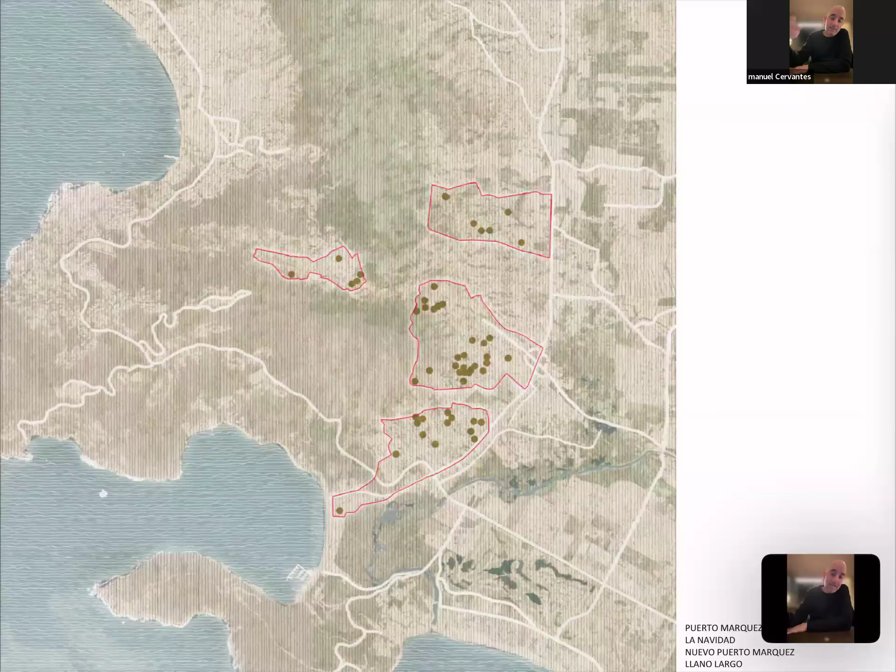That were very important to understand that helping sometimes is not that easy. Sometimes we need to create some circumstances to really help people and really help their communities. So that was the process of selecting the sites, and then the families or the people in need.

Another relevant part of the strategy was to convince all the people involved in the funding and all the companies and people investing in the project that the time to invest in the strategy, to invest in how to really help the people, was also important to achieve quality and not quantity.

Normally, governments and some private companies love to give money to these kinds of associations in exchange for a quantity, in exchange for numbers. So it was very difficult to convince them that it's impossible to design a housing or house solution as a system. So we convinced them with this strategy to first create a specific dialogue with individuals or families to really understand their needs.

A family is not always the same. In the context of Acapulco, we have very different kinds of family structures. We have single mothers, single fathers, grandparents with their kids or grandkids.

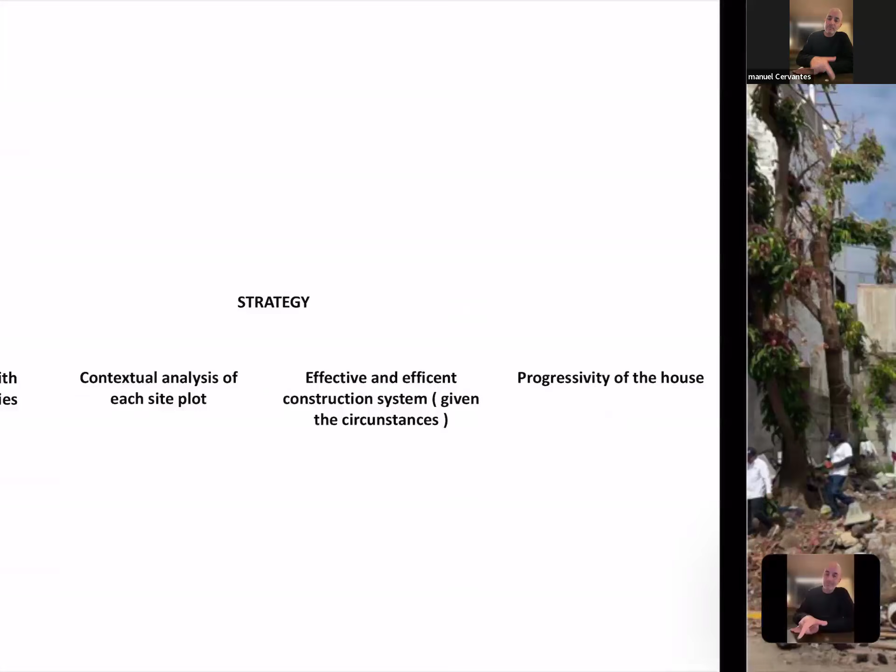So I'm going to show one site, one house, just to exemplify the process of design. This is the site of a single person, Julio Zamora, 75 years old. The house was completely destroyed, even the trees were ripped off. We took this and other houses, but I'll exemplify the exercise with this one.

We tried to avoid the generic prototype of a house that the government in Mexico normally uses. We decided to use what we call 'pie de casa,' or in English, 'starter home.' It's the concept of giving a beginning for the family, an architecture typology that gives these families the opportunity to progress and evolve through time.

Acapulco is a tropical region, with a lot of wind, sun exposure, and high temperatures. So we decided to explode the idea of the generic single unit house and think about the elements that create nice architecture in this kind of environment. The shade, the porch, and traditional architectural elements for this weather were the first strategy to incorporate eco-techniques available for this kind of house.

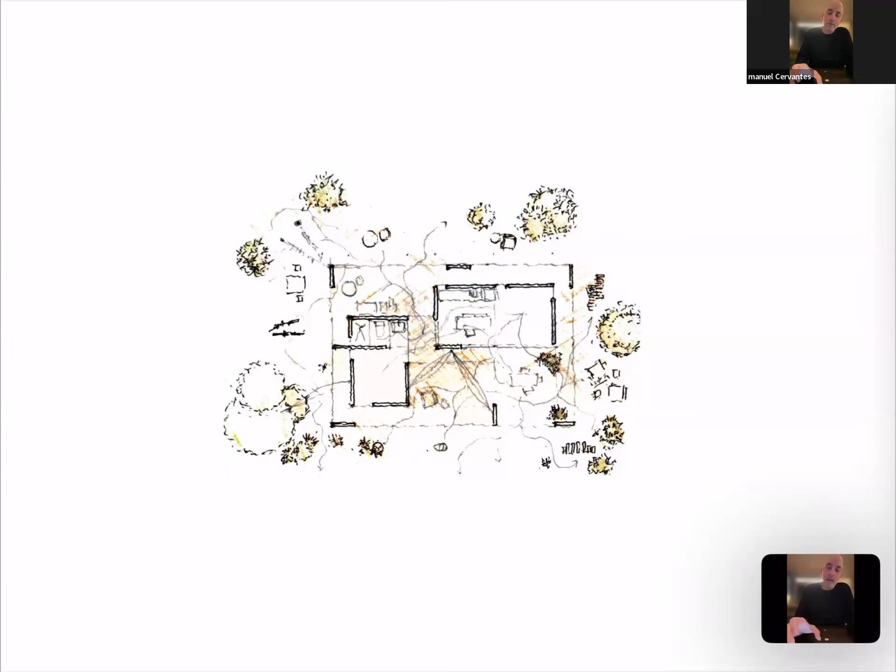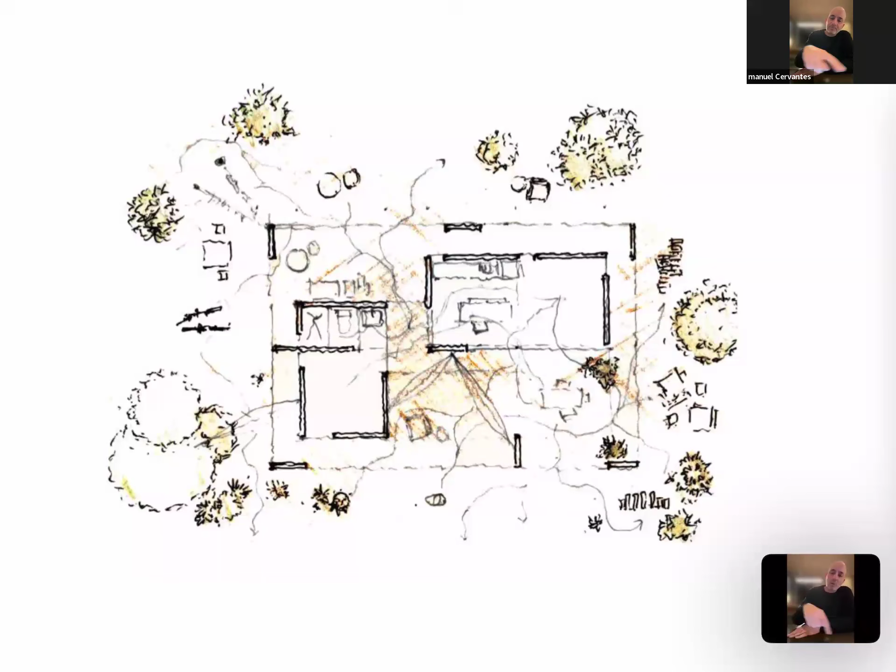We started with this diagram, understanding that a house or home is not about the architecture, the envelope, or the space—it's about how people relate to the outside, to the community, to the shaded part of the houses. In this diagram, we were understanding all the parts of the life of Julio Zamora.

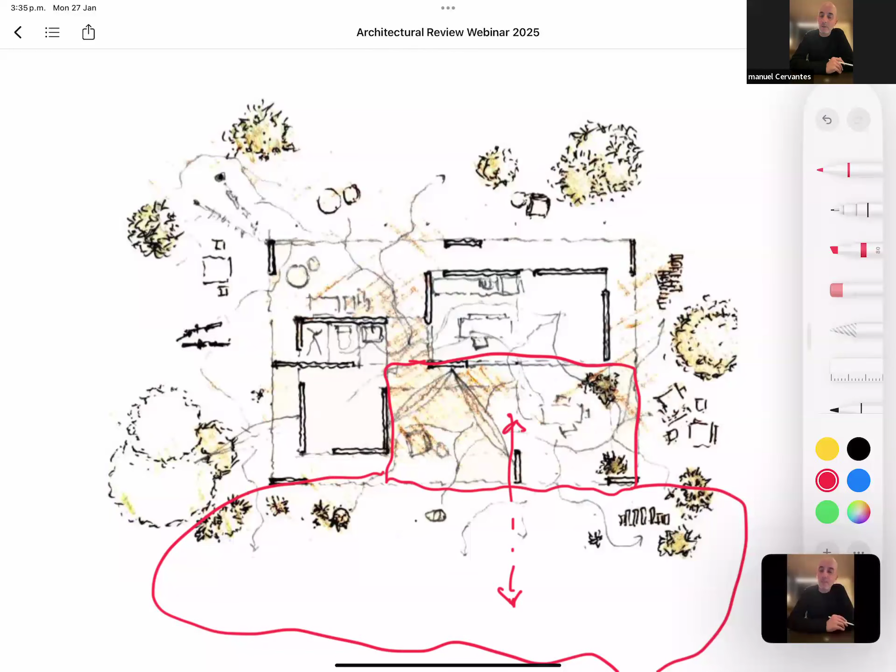Obviously, the big porch in the front connected to the outside, to the street, in order to be part of the community and avoid isolation, especially for an old person. Then understanding all the elements of his life—he had some elements to work with around that porch. The laundry area was next to a back patio, along with bicycles and other elements someone needs inside or outside a house.

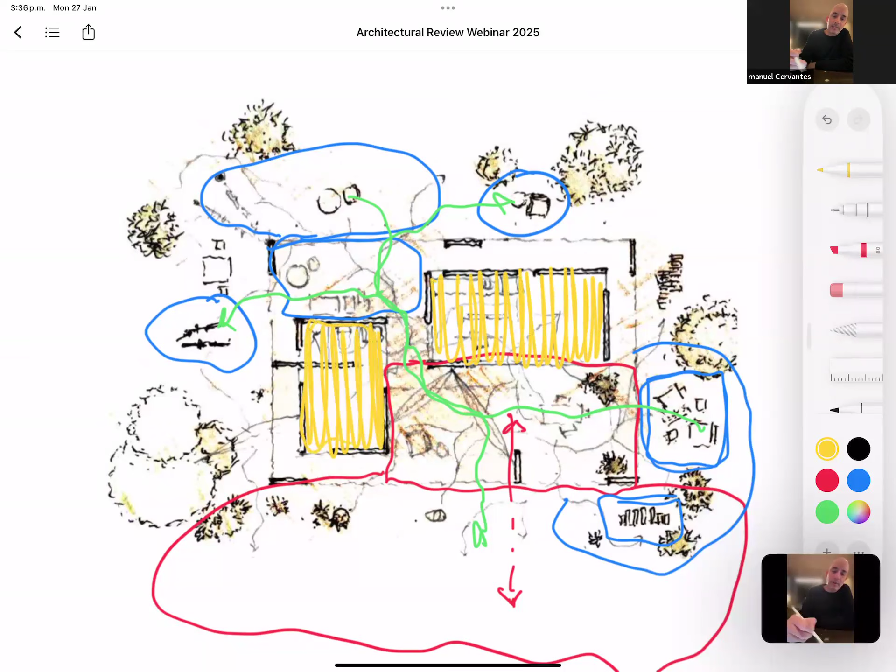Then it was about connecting all those points, connecting all those activities, and understanding that sometimes we're just people floating in spaces doing stuff. So architecture was never relevant as architecture—what was relevant was the activities of this person. At the end, the interior spaces were well connected to the outside and to all these different activities. That was the concept for the houses, attending to this specific area with its beautiful landscape and understanding all the activities.

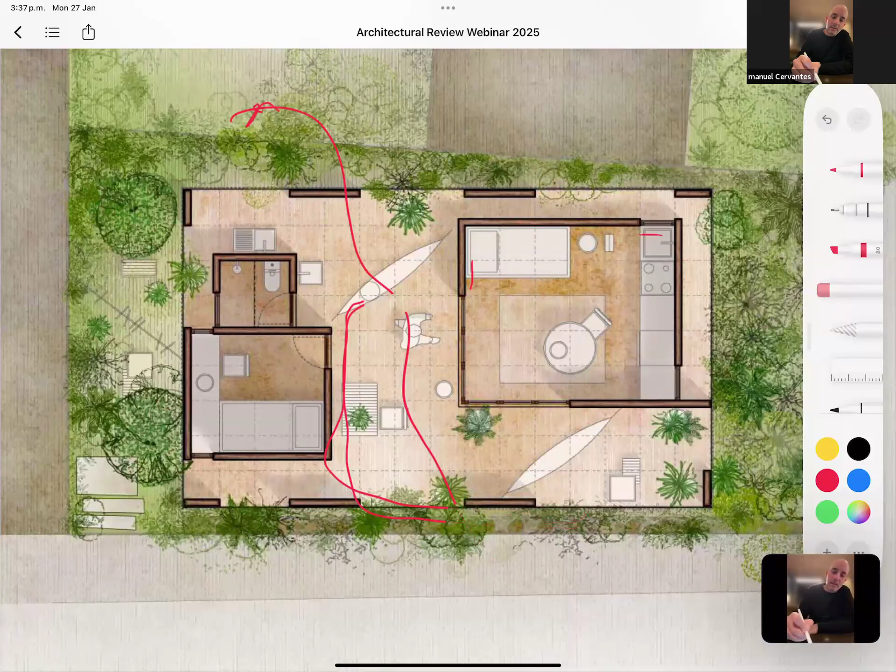So this is the result of this first house under the grid of a system, using those materials that we sent from Mexico City. Understanding the relationship that for this kind of weather is very relevant—interior and exterior, the flows, the natural ventilation, the breeze—creating a space that doesn't need mechanical assistance. There's recollection of water, cross ventilation, porches and overhangs for the sun.

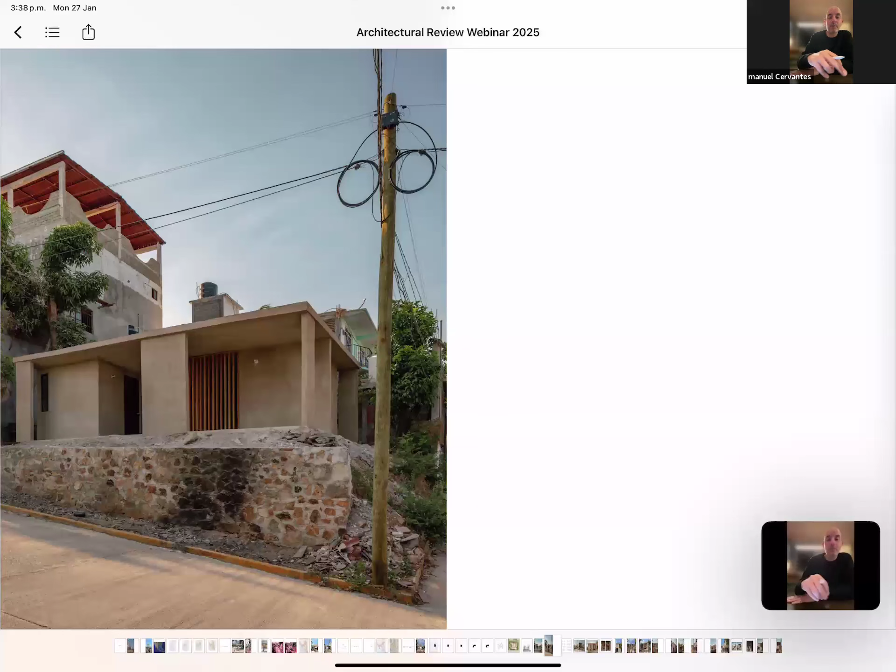And this was the result of this first house. These are some pictures showing the porch, the relationship of that porch and the street, and the relationship of the interior with that lattice communicating and ventilating.

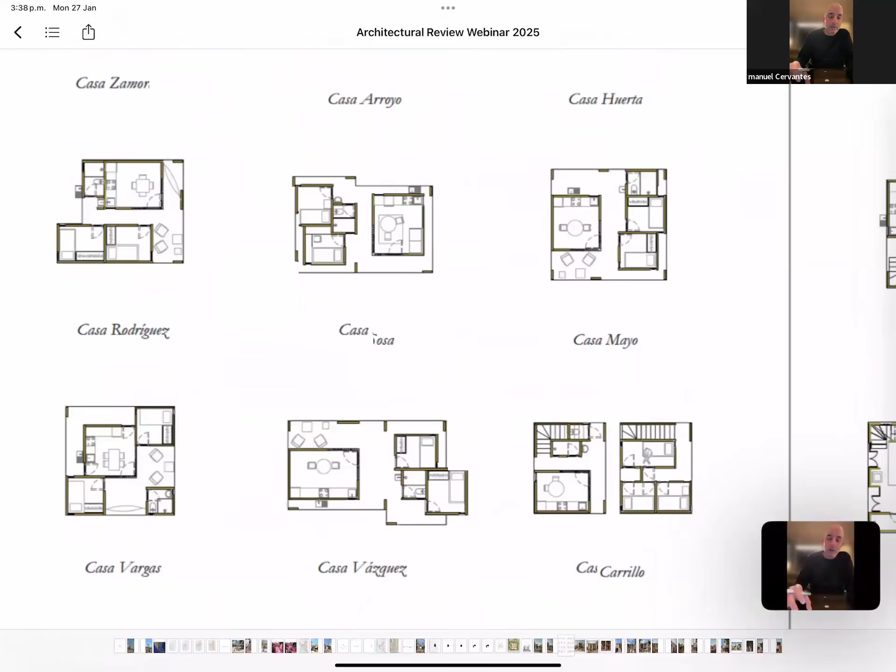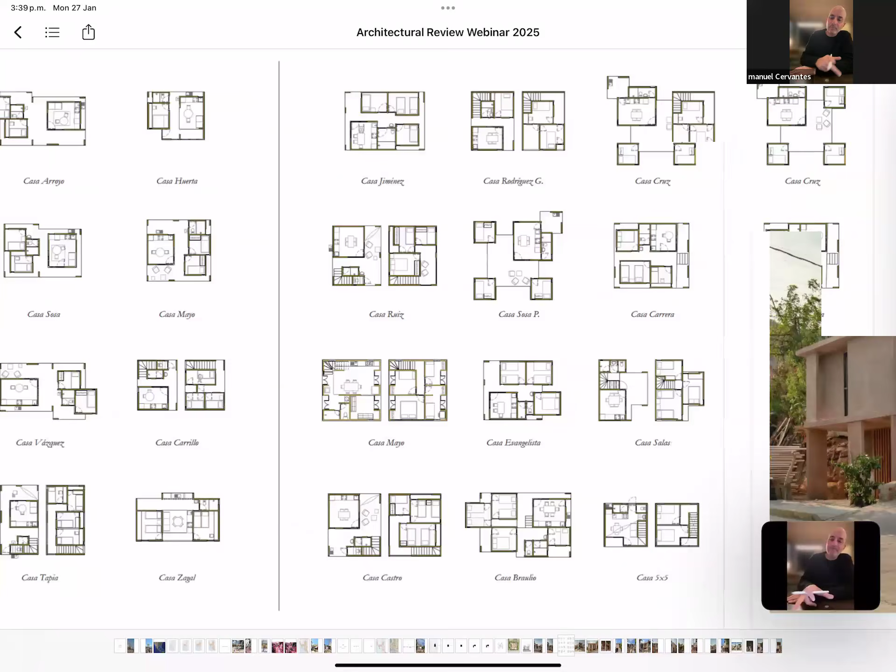Then we started designing many different houses, sometimes for single persons, sometimes for 2 bedrooms, 3 bedrooms, and we went up to the biggest one with 5 bedrooms. We designed houses as an exercise for a family on a specific site with specific conditions—houses of 1 story, 2 stories, even 3 stories, all arranged by the necessities of the people, the site conditions, neighbors, etc. These are different examples of houses within the same community, under the same circumstances.

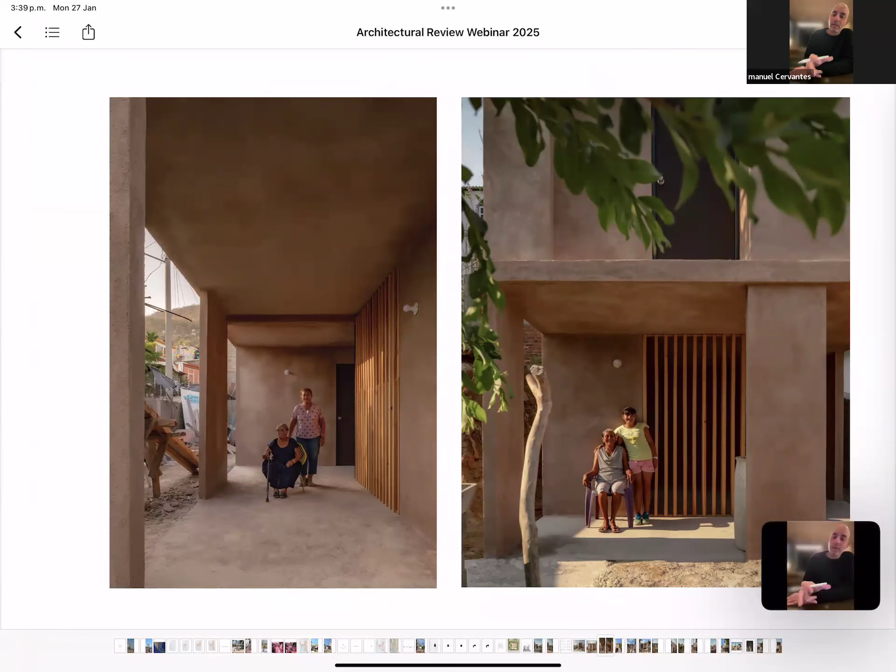Different situations, but the same ideas: porches, places to hang out. This is another typology that I will describe later. These are some of the houses in their context, and some pictures of the families.

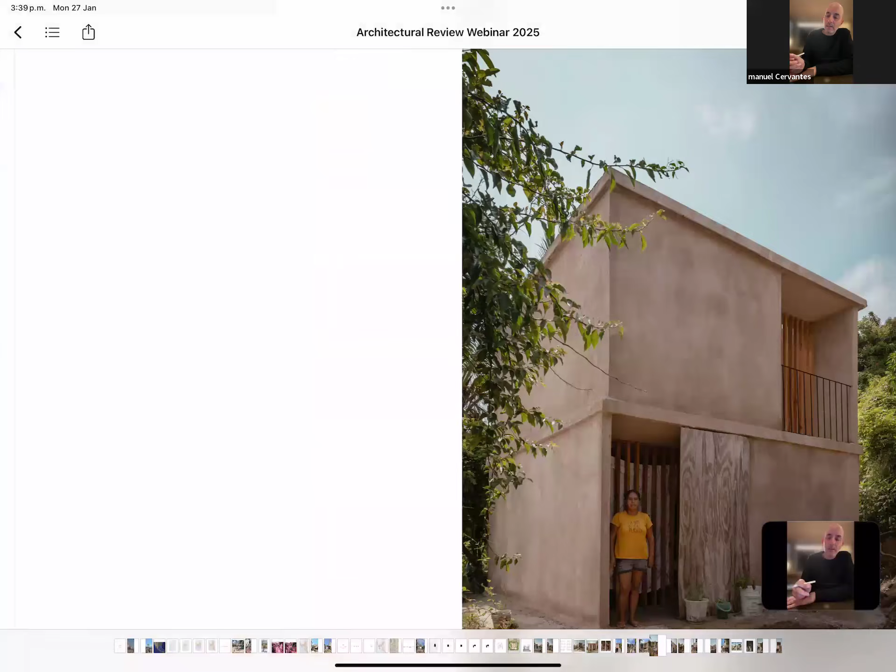Some of the houses receiving that progressive effect. The idea is that these slabs, which stick out a bit from the facade, are intended to receive other systems, creating bigger porches or even other spaces.

The idea of progressivity also recognizes that a lot of these people use their houses as stores or workshops. Many use the house not just to live in, but also to work in. We can see in these examples how they use the porches for little stores.

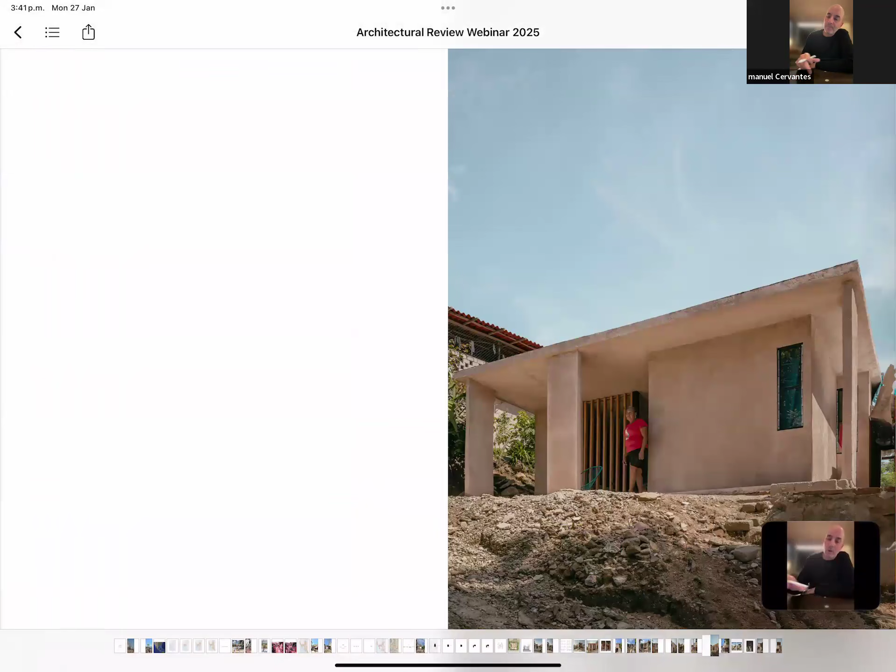Other pictures showing the philosophy. For the progressivity, we designed the system to show them the capacity of the houses to grow not only horizontally, but also vertically.

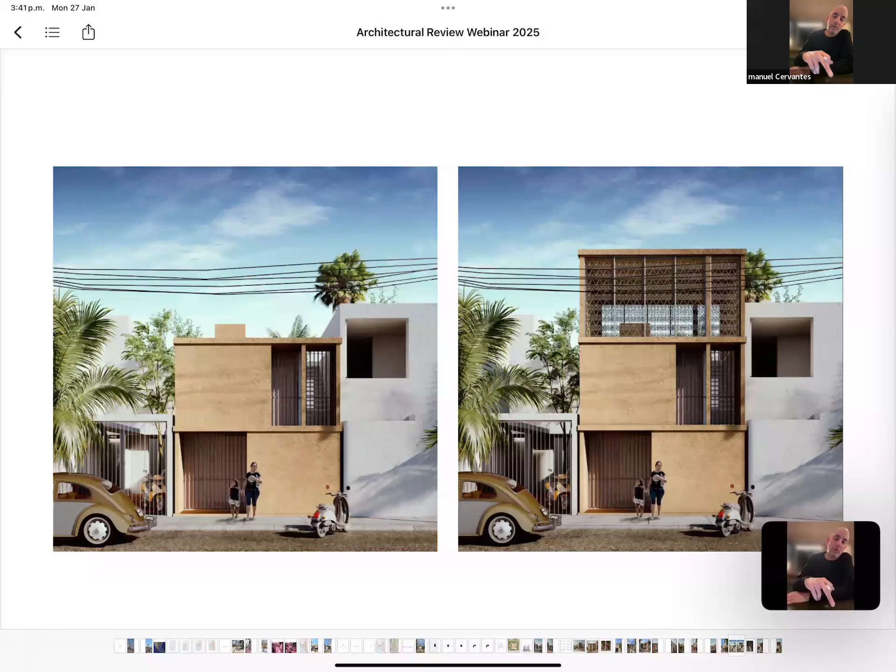So we created a manual, a system to show them how in the future they can go from one to two or even three stories, since that's the maximum of the system. This pie de casa is an investment in something that maybe at the beginning is for one family, but in the future can become two families plus a store.

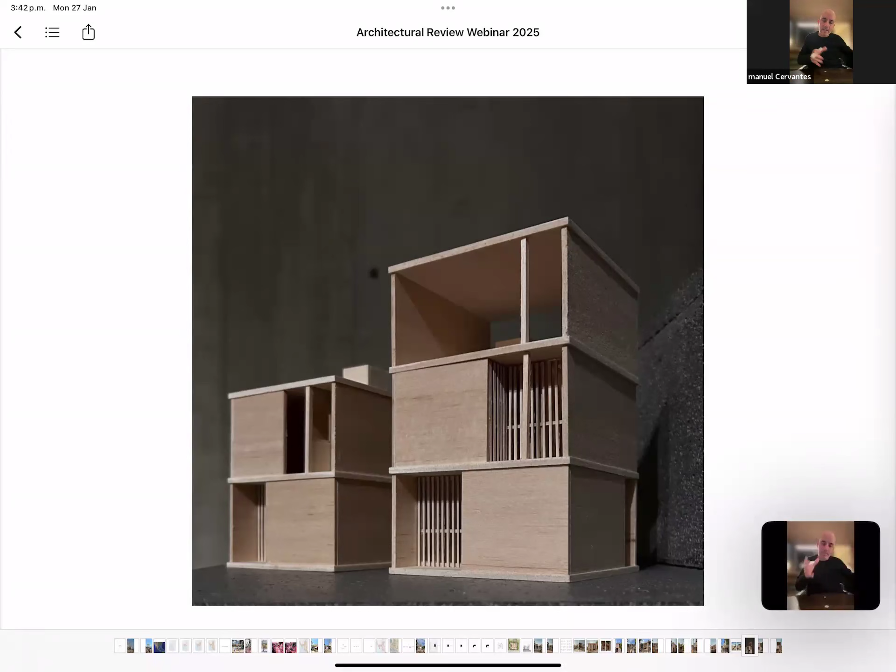In a way we are giving them the opportunity to understand how cities evolve. We can see here the pie de casa, the first two levels, and how they can create a third level to have another family or more rooms upstairs.

And that's it. I think it would be great to jump into the conversation.

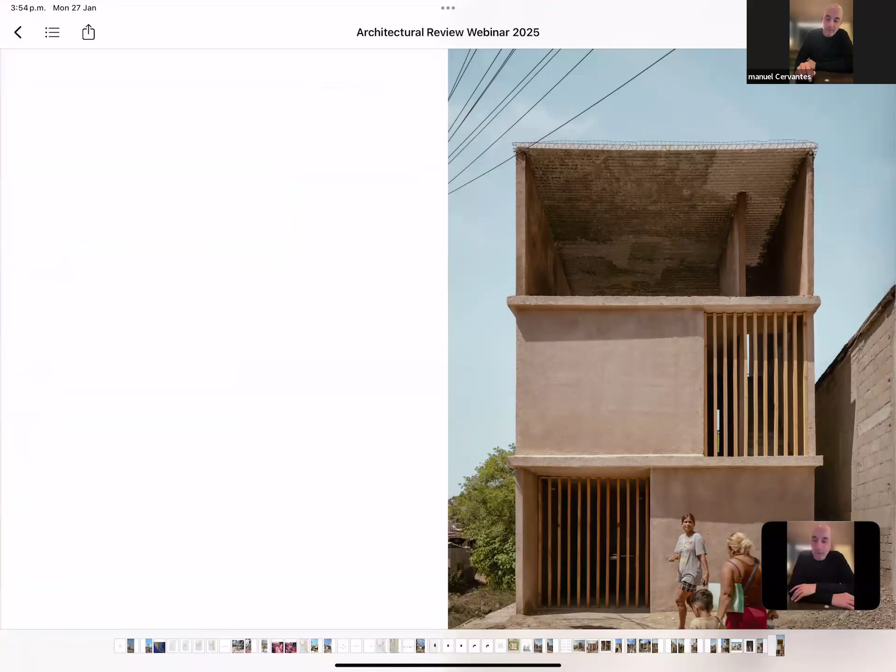Thank you. Well, thank you first for the recognition of a project like this. It has been a big exercise for us at the office, at the studio. And to try to answer the questions, it was very, very difficult to talk with the

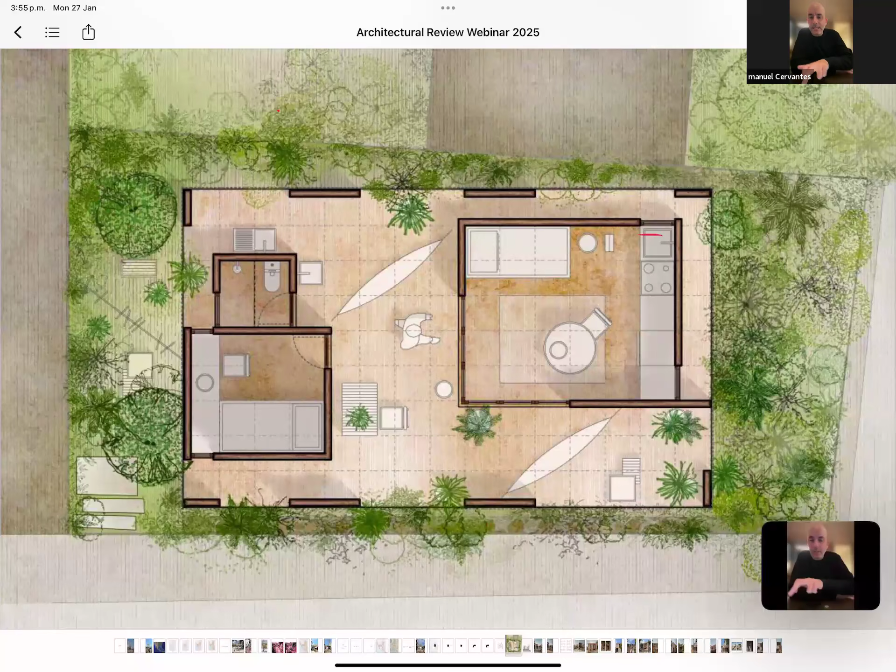families or the people that were under this emergency and ask them for time. Obviously, a lot of these people were expecting to have a quick solution and a quick result. So it was a big process to show them the past governmental assistance and the result of that, to prove that those kind of projects are terrible. And again, ask them for time to think with them in order to understand the real needs. So that was the first big difficulty.

Then we started the process that was, again, not only architectural, it was about finding which of these families were eligible to have a house. Again, to see if they were owners, to see if they were willing to have the help, to see if they were willing not to have the governmental assistance, which was kind of a contradiction with their project, because the government decided to help people, giving them things like refrigerators, beds, cement, gravel, and stuff like that.

And a lot of people that received construction material were, let's say, monitored by the government to see if they were really building something and not selling the material. So it was very difficult to convince the people not to receive that assistance in order not to build something that was not intelligent, and to wait again, to design their needs under the system and in a specific site.

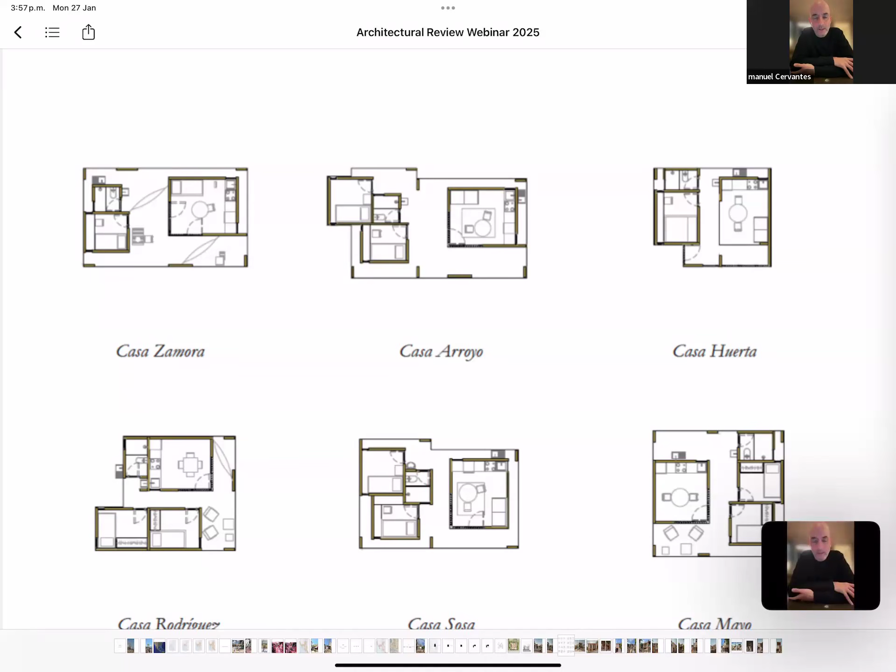So to convince them on how to work with topography, with the natural ventilation, with the porches, with the eco or passive techniques of the house in a place where security is a huge problem. So we dealt a lot with security issues in terms of design to convince the people that porches were important to be exposed to the community, exposed to the city. So even through the process of construction, after the design process, we changed some things to adapt to the necessities of security in order to avoid these kind of structures that you have around the area.

So it was very difficult not only to convince them, but to help them avoid this hermetic, secure architecture that goes against all the passive techniques of a house for this kind of weather. And then to convince them on how to think about the progressive part of the house.

But well, it was amazing because probably 99% of the families were not only positive, but also happy to work with us. They were happy with this interaction and collaboration in order to attend their specific necessities under the circumstances, not only of Acapulco, but also a system, because for obvious reasons it was impossible to design everything completely different. We had to create some kind of boundaries and some kind of system, and inside that system, be flexible.